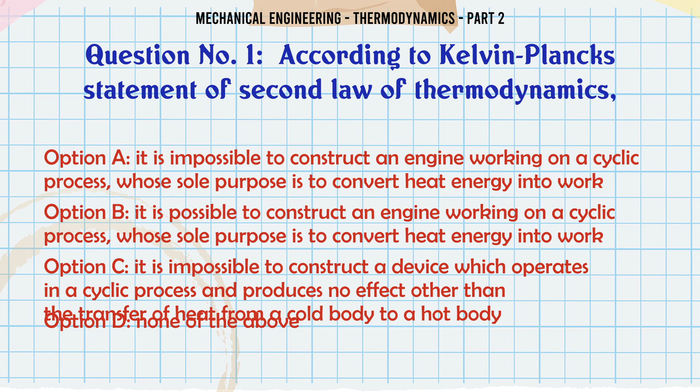According to Kelvin-Planck's statement of the second law of thermodynamics: A. It is impossible to construct an engine working on a cyclic process whose sole purpose is to convert heat energy into work. B. It is possible to construct such an engine. C. It is impossible to construct a device which operates in a cyclic process and produces no effect other than the transfer of heat from a cold body to a hot body. D. None of the above. The correct answer is A: it is impossible to construct an engine working on a cyclic process whose sole purpose is to convert heat energy into work.

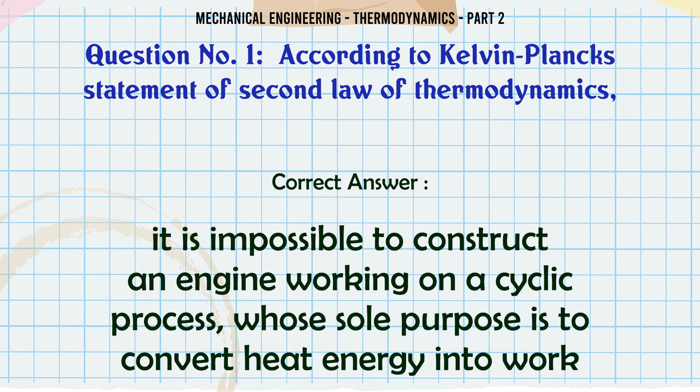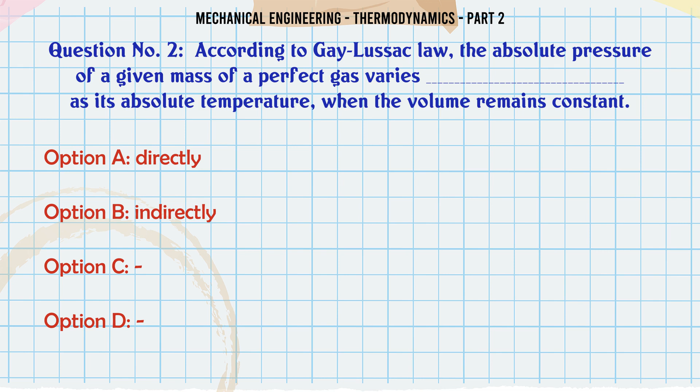According to Gay-Lussac's law, the absolute pressure of a given mass of a perfect gas varies as its absolute temperature when the volume remains constant. A. Directly. B. Indirectly. The correct answer is directly.

According to Avogadro's law: A. The product of the gas constant and the molecular mass of an ideal gas is constant. B. The sum of partial pressure of the mixture of two gases is the sum of the two. C. Equal volumes of all gases at the same temperature and pressure contain equal number of molecules. D. All of the above. The correct answer is C: equal volumes of all gases at the same temperature and pressure contain equal number of molecules.

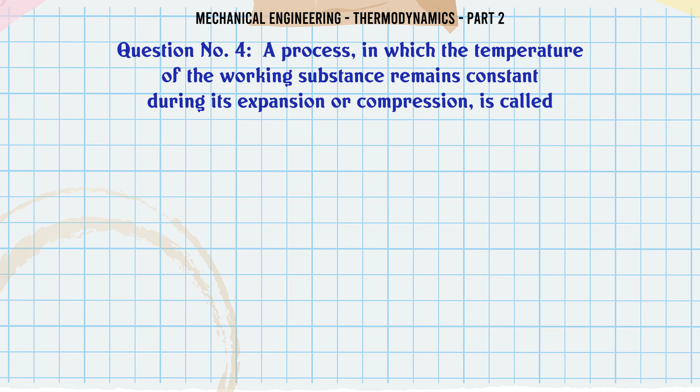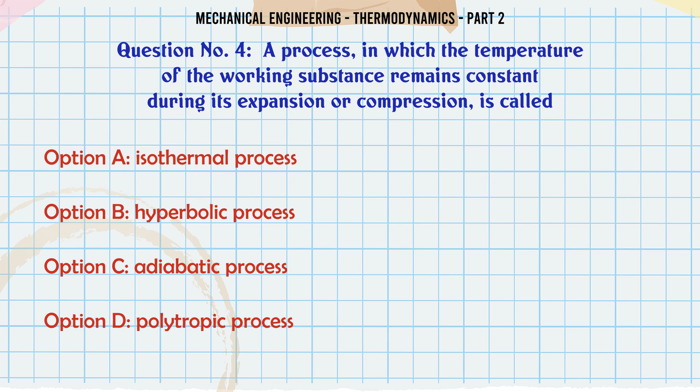A process in which the temperature of the working substance remains constant during its expansion or compression is called: A. Isothermal process. B. Hyperbolic process. C. Adiabatic process. D. Polytropic process. The correct answer is isothermal process.

Which of the following gases has a minimum molecular mass? A. Oxygen. B. Nitrogen. C. Hydrogen. D. Methane. The correct answer is hydrogen.

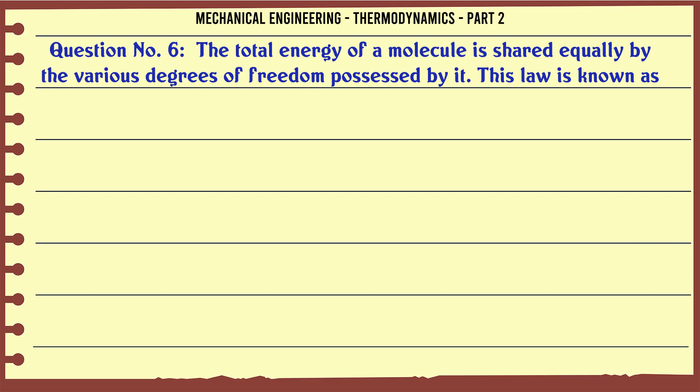The total energy of a molecule is shared equally by the various degrees of freedom possessed by it. This law is known as: A. Law of equipartition of energy. B. Law of conservation of energy. C. Law of degradation of energy. D. None of these. The correct answer is law of equipartition of energy.

The thermodynamic property of a system is said to be an intensive property whose value for the entire system is ___ the sum of their value for the individual parts of the system. A. Equal to. B. Not equal to. The correct answer is not equal to.

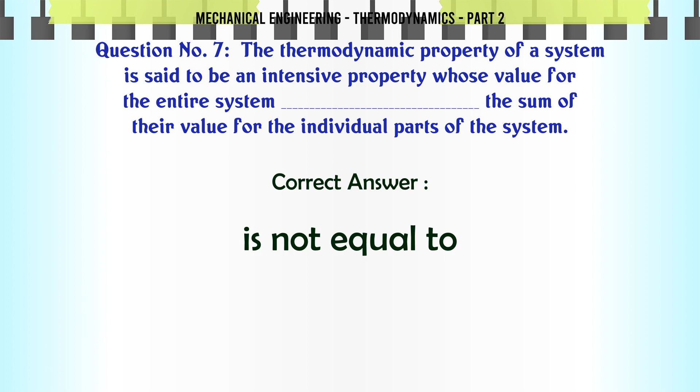The absolute pressure of a given mass of a perfect gas varies inversely as its volume when the temperature remains constant. This statement is known as Joule's law. A. Yes. B. No. The correct answer is no.

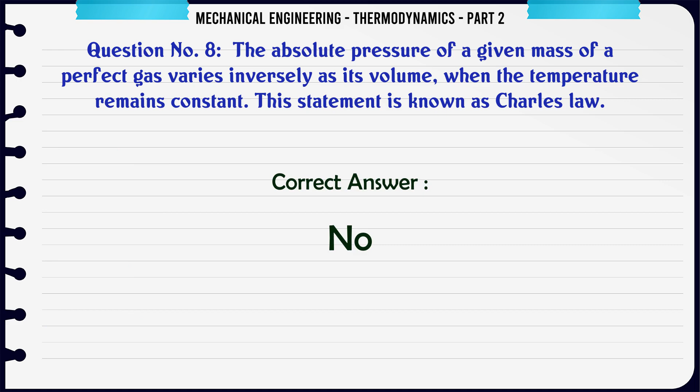The fuel mostly used in steam boilers is: A. Brown coal. B. Peat. C. Coking bituminous coal. D. Non-coking bituminous coal. The correct answer is non-coking bituminous coal.

The efficiency of the Joule cycle is: A. Greater than Carnot cycle. B. Less than Carnot cycle. C. Equal to Carnot cycle. D. None of these. The correct answer is less than Carnot cycle.

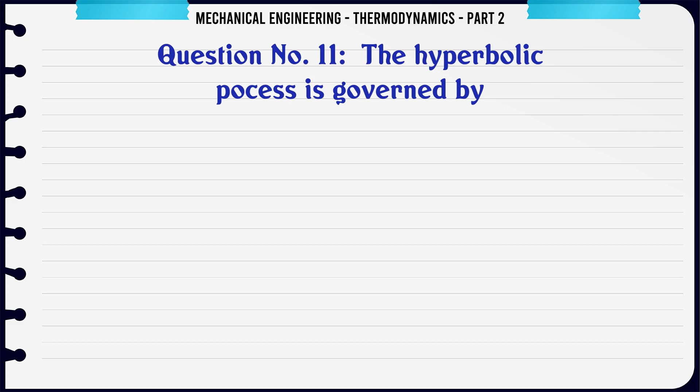The hyperbolic process is governed by: A. Boyle's law. B. Charles' law. C. Gay-Lussac law. D. Avogadro's law. The correct answer is Boyle's law.

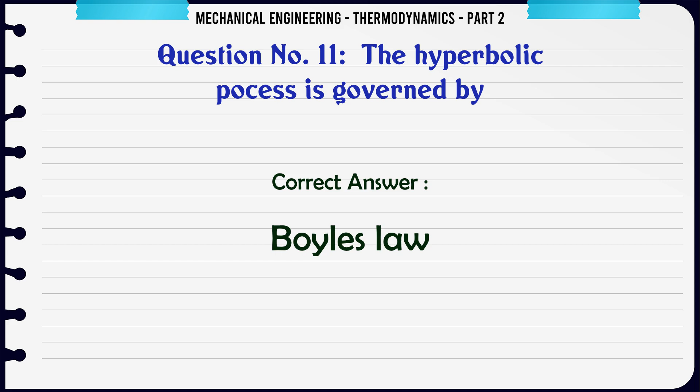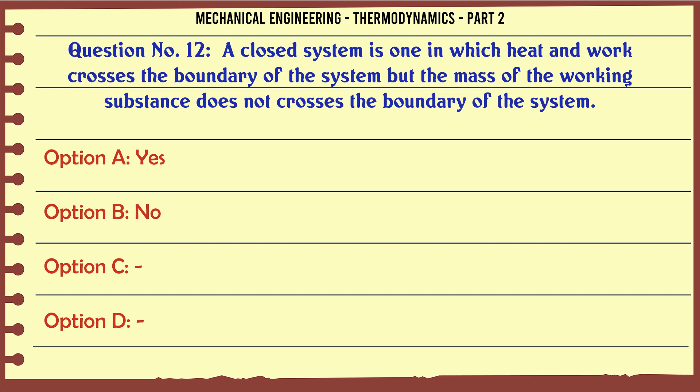A closed system is one in which heat and work cross the boundary of the system but the mass of the working substance does not cross the boundary of the system. A. Yes. B. No. The correct answer is yes.

The entropy of water at 0 degrees Celsius is assumed to be: A. 1. B. 0. C. -1. D. 10. The correct answer is 0.

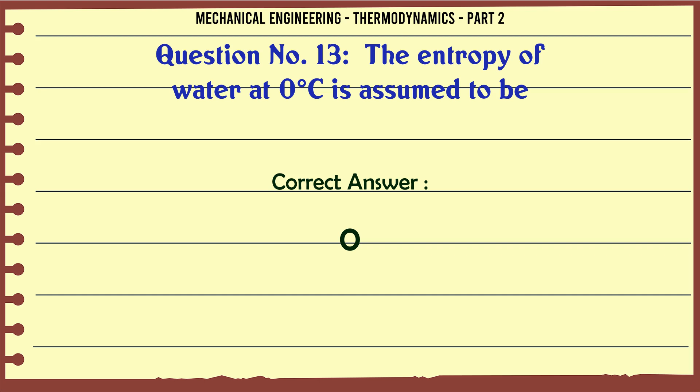The greater the pressure difference in throttling, the lesser is the irreversibility. A. Yes. B. No. The correct answer is no.

During which of the following processes does heat rejection take place in the Carnot cycle? A. Isothermal expansion. B. Isentropic expansion. C. Isothermal compression. D. Isentropic compression. The correct answer is isothermal compression.

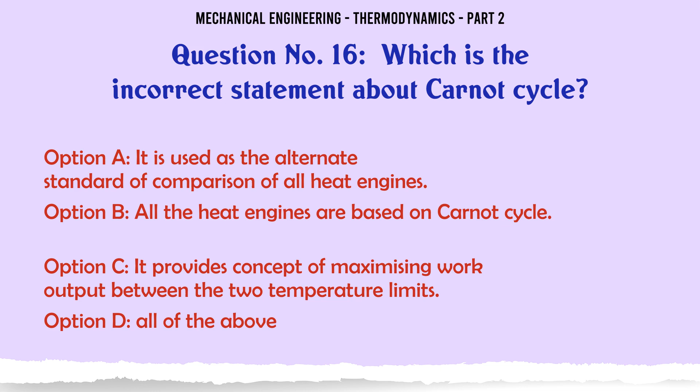Which is the incorrect statement about the Carnot cycle? A. It is used as the alternate standard of comparison of all heat engines. B. All the heat engines are based on Carnot cycle. C. It provides the concept of maximizing work output between the two temperature limits. D. All of the above. The correct answer is B: all the heat engines are based on Carnot cycle.

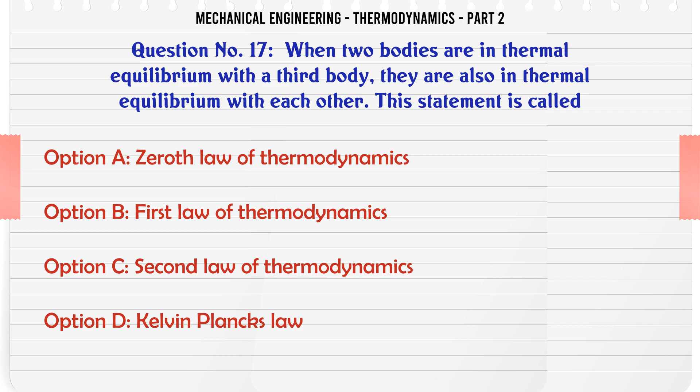When two bodies are in thermal equilibrium with a third body, they are also in thermal equilibrium with each other. This statement is called: A. Zeroth law of thermodynamics. B. First law of thermodynamics. C. Second law of thermodynamics. D. Kelvin-Planck's law. The correct answer is zeroth law of thermodynamics.

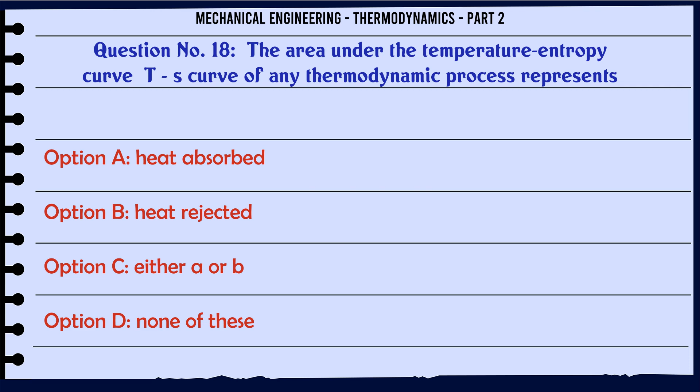The area under the temperature-entropy (T-s) curve of any thermodynamic process represents: A. Heat absorbed. B. Heat rejected. C. Either A or B. D. None of these. The correct answer is either A or B.

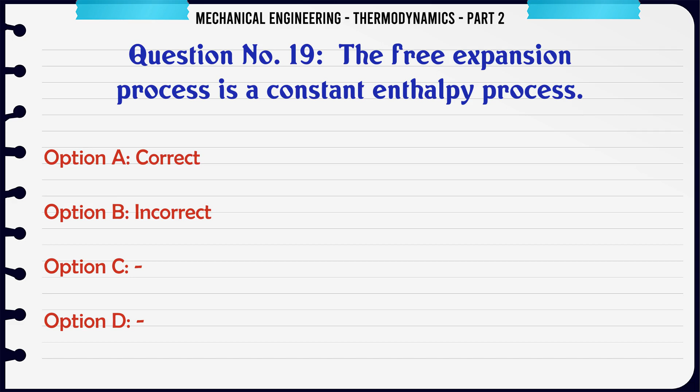The free expansion process is a constant enthalpy process. A. Correct. B. Incorrect. The correct answer is correct.

The specific heat at constant volume is: A. The amount of heat required to raise the temperature of unit mass of gas through 1 degree at constant pressure. B. The amount of heat required to raise the temperature of unit mass of gas through 1 degree at constant volume. C. The amount of heat required to raise the temperature of 1 kilogram of water through 1 degree. D. Any one of the above. The correct answer is B: the amount of heat required to raise the temperature of unit mass of gas through 1 degree at constant volume.

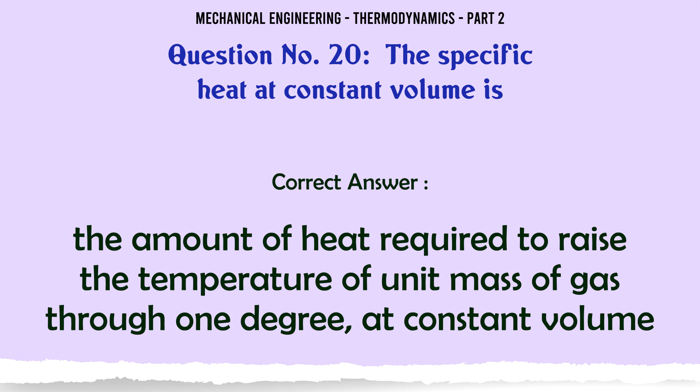1 kg of carbon produces how many kg of carbon dioxide? A. 3/7. B. 7/3. C. 11/3. D. 3/11.

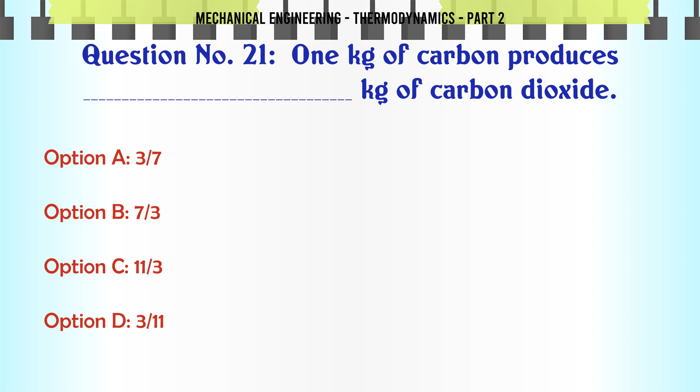The correct answer is 11/3.

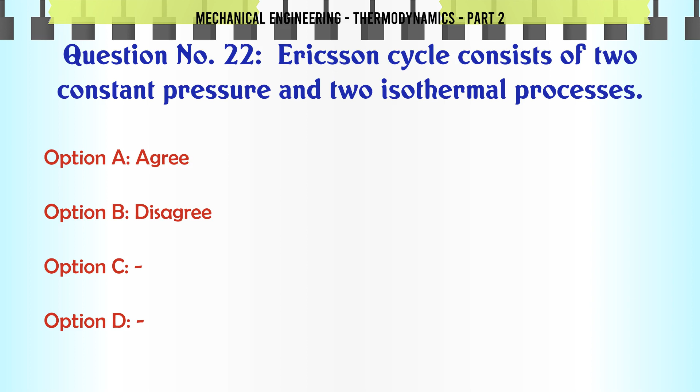Ericsson cycle consists of 2 constant pressure and 2 isothermal processes. Agree or disagree? The correct answer is agree.

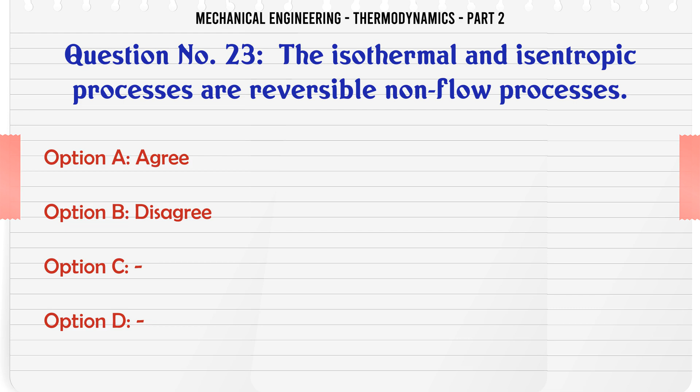The isothermal and isentropic processes are reversible non-flow processes. Agree or disagree? The correct answer is agree.

The blast furnace gas is a byproduct in the production of pig iron in the blast furnace. Yes or no? The correct answer is yes.

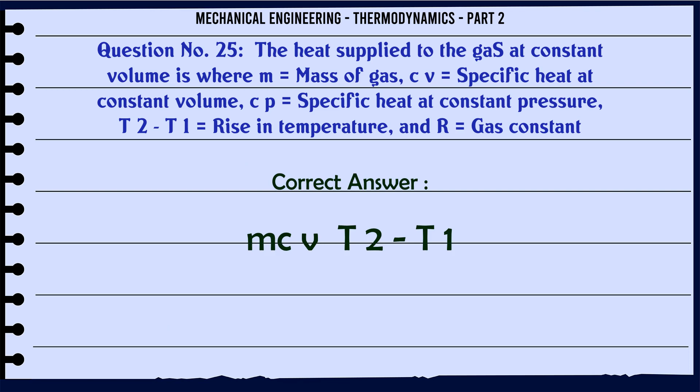Liquid fuels have lower efficiency than solid fuels. True or false? The correct answer is false.

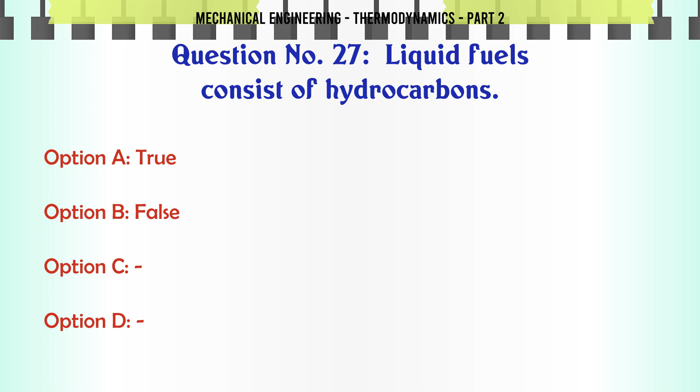Liquid fuels consist of hydrocarbons. True or false? The correct answer is true.

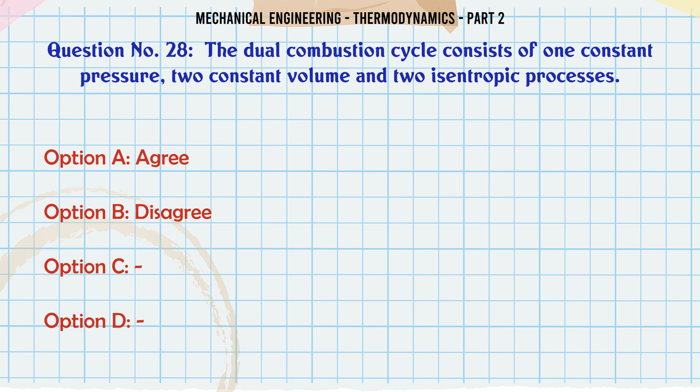The dual combustion cycle consists of 1 constant pressure, 2 constant volume, and 2 isentropic processes. Agree or disagree? The correct answer is agree.

The compression ratio for diesel engines is A. 3 to 6, B. 5 to 8, C. 15 to 20, D. 20 to 30. The correct answer is 15 to 20.

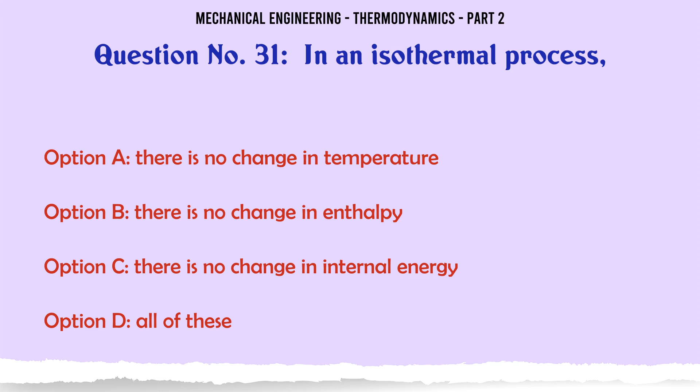In an isothermal process: A. there is no change in temperature, B. there is no change in enthalpy, C. there is no change in internal energy, D. all of these. The correct answer is all of these.

Which of the following is the correct statement of the second law of thermodynamics? A. It is impossible to construct an engine working on a cyclic process whose sole purpose is to convert heat energy into work. B. It is impossible to transfer heat from a body at a lower temperature to a higher temperature without the aid of an external source. C. There is a definite amount of mechanical energy which can be obtained from a given quantity of heat energy. D. All of the above. The correct answer is all of the above.

The heating and expanding of a gas is called a thermodynamic system. Yes or no? The correct answer is no.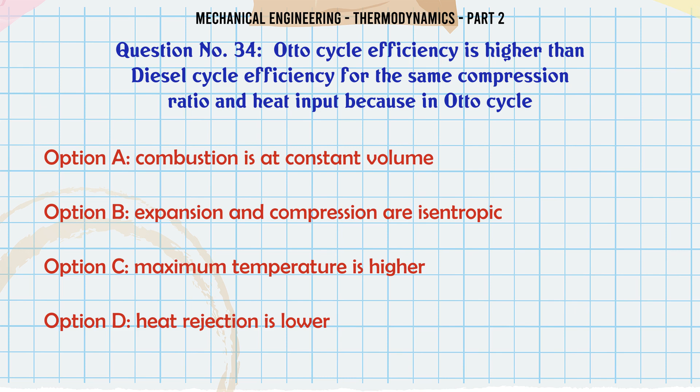Otto cycle efficiency is higher than diesel cycle efficiency for the same compression ratio and heat input because in Otto cycle: A. combustion is at constant volume, B. expansion and compression are isentropic, C. maximum temperature is higher, D. heat rejection is lower. The correct answer is heat rejection is lower.

Liquid fuels have higher calorific value than solid fuels. Yes or no? The correct answer is yes.

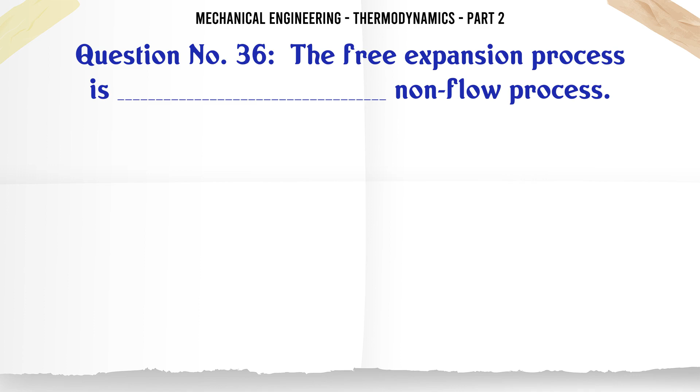The free expansion process is a non-flow process. Is it reversible or irreversible? The correct answer is irreversible.

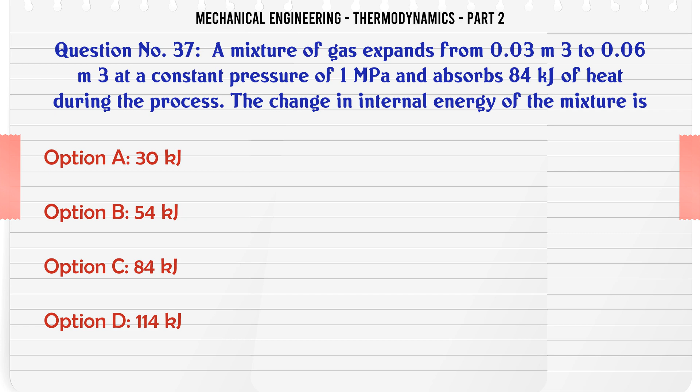A mixture of gas expands from 0.03 m3 to 0.06 m3 at a constant pressure of 1 MPa and absorbs 84 kJ of heat during the process. The change in internal energy of the mixture is: A. 30 kJ, B. 54 kJ, C. 84 kJ, D. 114 kJ. The correct answer is 54 kJ.

The gas constant R is equal to the of two specific heats. A. sum, B. difference, C. product, D. ratio. The correct answer is difference.

Hydrogen is the substance. A. lightest, B. heaviest. The correct answer is lightest.

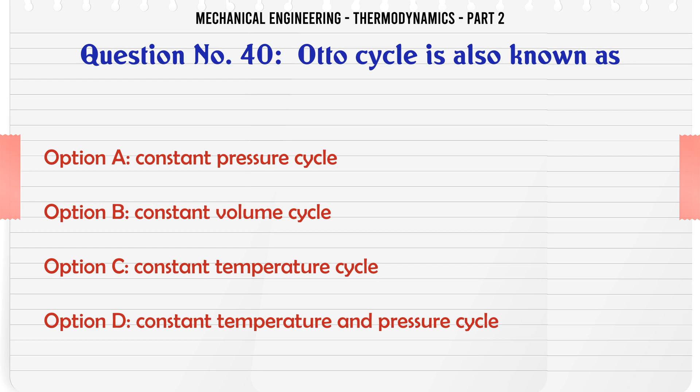Otto cycle is also known as: A. constant pressure cycle, B. constant volume cycle, C. constant temperature cycle, D. constant temperature and pressure cycle. The correct answer is constant volume cycle.

For a perfect gas according to Boyle's law, where P is absolute pressure, V is volume and T is absolute temperature: A. PV constant if T is kept constant, B. V/T constant if P is kept constant, C. P/T constant if V is kept constant, D. T/P constant if V is kept constant. The correct answer is PV constant if T is kept constant.

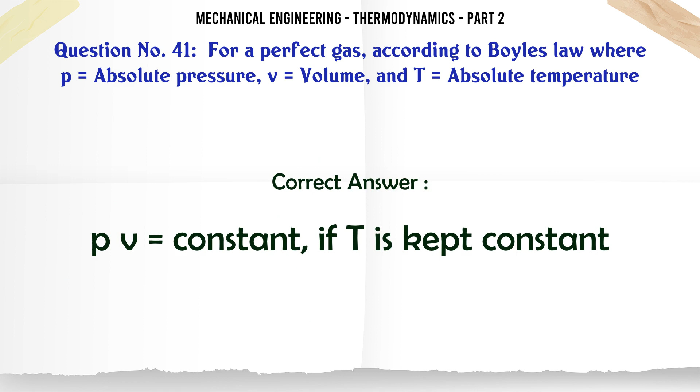Producer gas is obtained by: A. partial combustion of coal, coke, anthracite coal or charcoal in a mixed air steam blast, B. carbonization of bituminous coal, C. passing steam over incandescent coke, D. passing air and a large amount of steam over waste coal at about 650 degrees C. The correct answer is partial combustion of coal, coke, anthracite coal or charcoal in a mixed air steam blast.

The efficiency of a dual combustion cycle depends upon cut-off ratio. Does it depend or not depend? The correct answer is depends.

The efficiency of diesel cycle depends upon: A. temperature limits, B. pressure ratio, C. compression ratio, D. cut-off ratio and compression ratio. The correct answer is cut-off ratio and compression ratio.

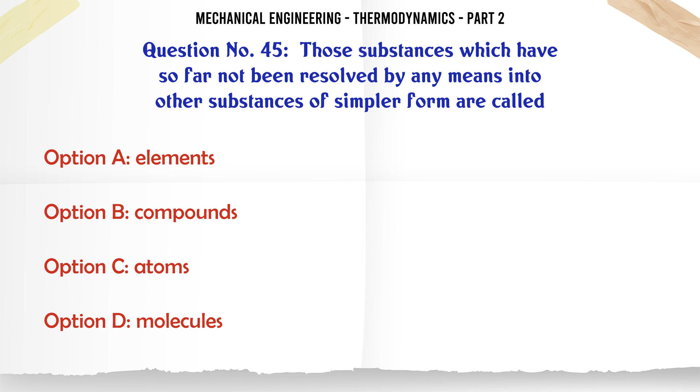Those substances which have so far not been resolved by any means into other substances of simpler form are called: A. elements, B. compounds, C. atoms, D. molecules. The correct answer is elements.

The measurement of a thermodynamic property known as temperature is based on: A. zeroth law of thermodynamics, B. first law of thermodynamics, C. second law of thermodynamics, D. none of these. The correct answer is zeroth law of thermodynamics.

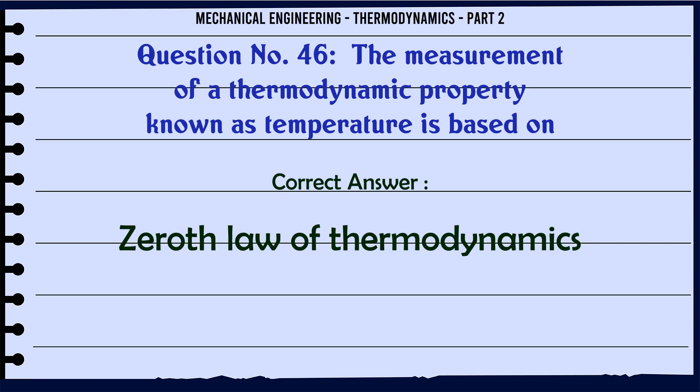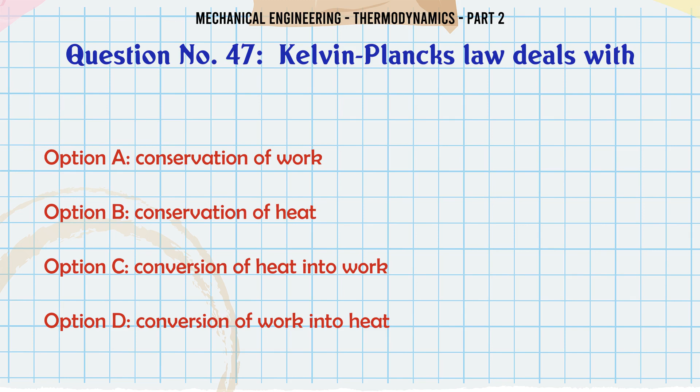Kelvin-Planck's law deals with: A. conservation of work, B. conservation of heat, C. conversion of heat into work, D. conversion of work into heat. The correct answer is conversion of heat into work.